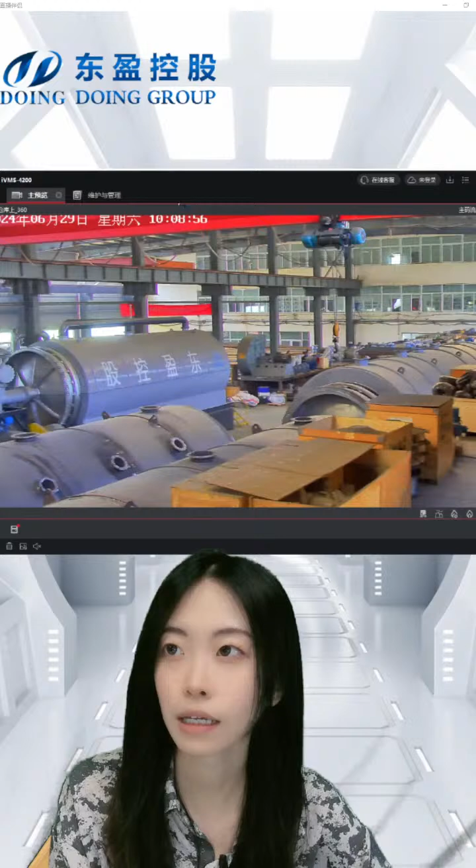I can show you some monitors about our factory. Wait a minute, these are some monitors. I'm not sure whether you can see. This is the monitor right now, showing our factory. And this is the name of our company, we call it Dongying Konggu in Chinese, and in English we call it Henan Doing Environmental Protection Company.

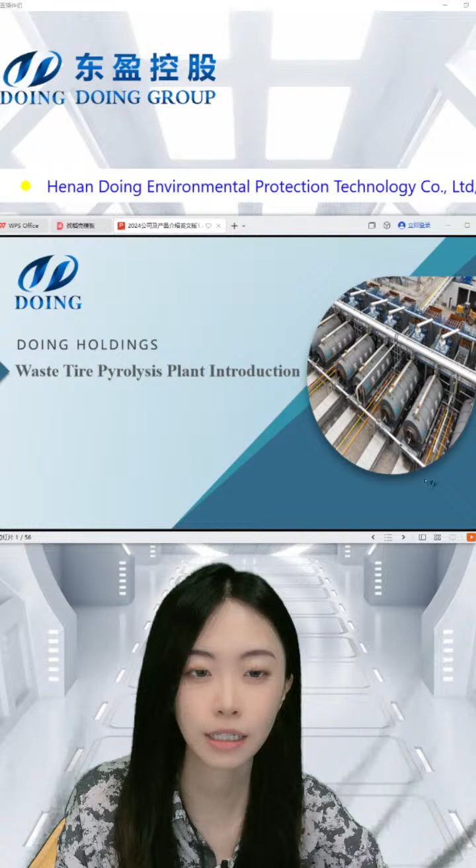Today I'm going to tell you about this PowerPoint, to show the material, show the industry, show the design, the technique of our equipment. And this is the contents. I will show you about our company and show what equipment our company has. We have three kinds of equipment: the batch type pyrolysis plant, the fully continuous pyrolysis plant, and a semi-continuous pyrolysis plant.

They have different kinds of raw material to deal with, and they have their advantages. The features of each is different. So today I'm going to tell you. Any questions you want, just let me know, and thank you.

The third thing is I will show you how our products can be used, what it's used for. Okay, and next is the most important thing, the most common thing our bosses, our friends, our clients have asked, is the environmental protection system. I will show you later.

So you may ask, does our equipment have pollution, or is it environmentally friendly? Does the government allow us to do this project? Well, I will show you. And now I can first tell you that we are environmentally friendly, and for example, in China, our government encourages us to do this project. But first, you need to have some allowance, appliance to the government.

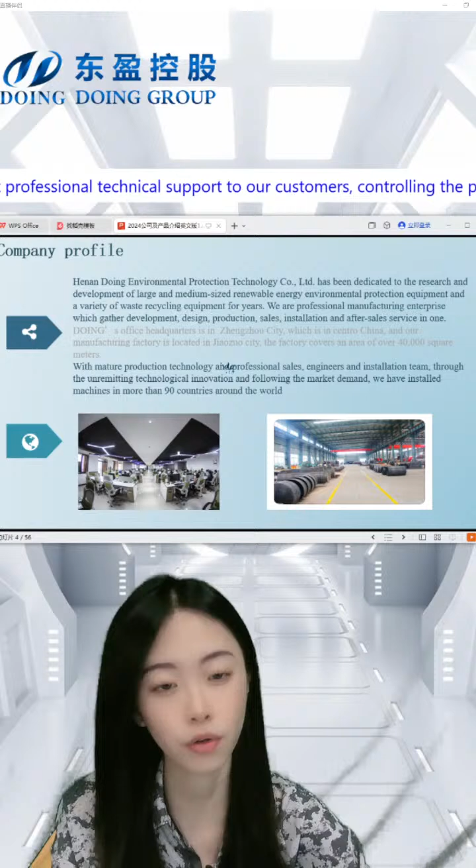We were set up in 2011, and we have a history of more than 10 years. We have more experience in the history, the market, the industry, and the design of the equipment. We have professional manufacturing enterprise, which gathers development, design, production, sales, installation, and after-sales service in one.

We are located in Zhengzhou City, which is in central China, and our manufacturing factory is located in Jiaozuo City, nearby Zhengzhou. It's the nearest factory to Zhengzhou City, and the factory covers an area of 40,000 square meters, very large. You can see just now many kinds of equipment fully occupy the factory.

With mature production technology and professional sales engineers and installation team, through technology innovation and following market demand, we have installed machines in more than 90 countries around the world. So we have our clients all over the world, not only in China but in other continents, in other countries. Let's have a look at the distribution of our clients.

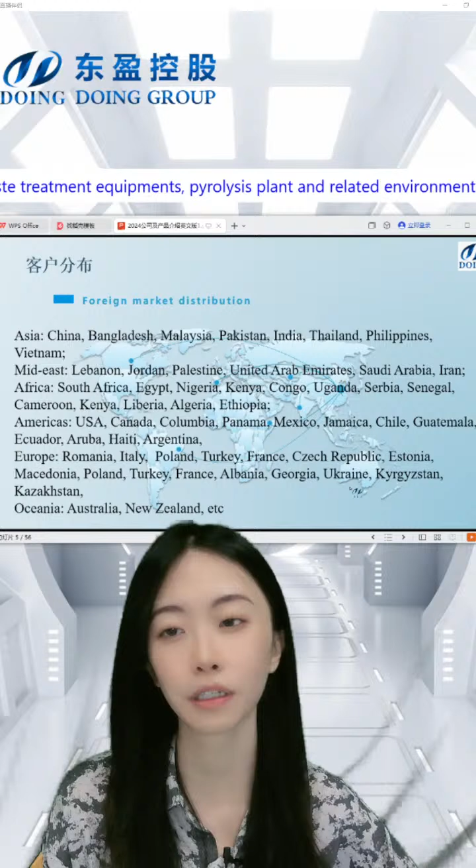So clients are welcome to visit our client's factory to see how our equipment works, or what profit they can get. Is it worth having this project? You can have a look. Visitors are also welcome at our company, our factory, or our client's factory. Both are okay.

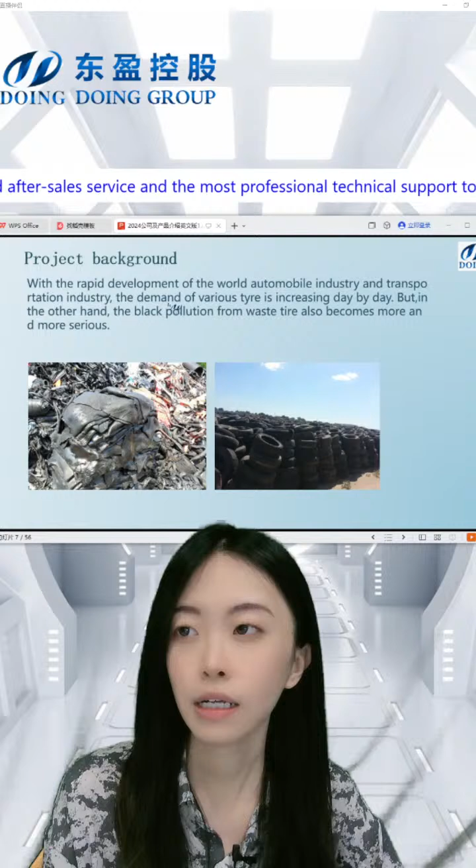Let's see the background of our equipment, or of this kind of product. With the rapid development of the world automobile industry and transportation industry, the demand for various tires is increasing day by day. But on the other hand, the black pollution from waste tires has also become more and more serious.

These are some ways to deal with waste tires, but we can see that they cause more pollution. Waste tire is a kind of non-fusible or refractory polymer material. It takes hundreds of years for the large molecules to break down, and it affects the normal growth of plants in the earth.

More and more waste tires not only take up large quantities of farmland, but also breed insect-borne diseases, causing serious environmental pollution. It will have some influence on people's life and property security. So it's called black pollution.

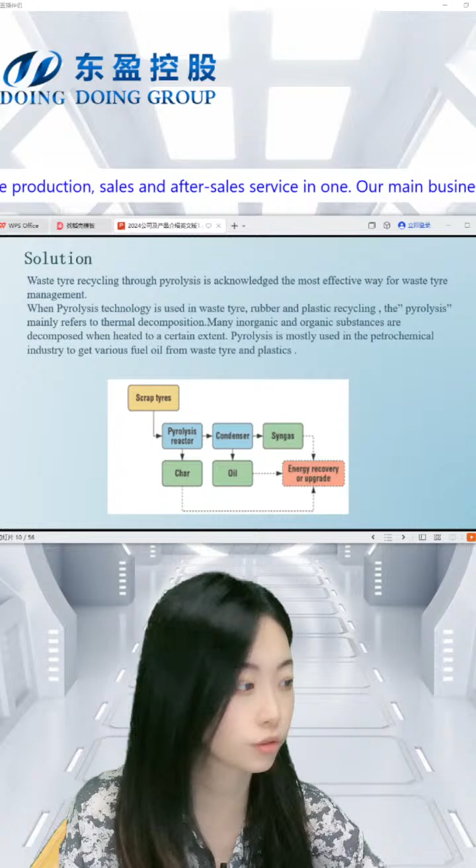As for our equipment, it can transform waste tires, waste plastic, oil sludge, medical waste, or daily waste into treasure, into oil, into fuel oil. This oil can be used by factories, brick factories, glass factories, and plenty of other places. This is one solution to deal with waste tires: to pyrolyze them.

While waste tire recycling through pyrolysis is acknowledged as the most effective way for waste tire management, I'll show you later how this work line works, how to transform the waste tire to the oil.

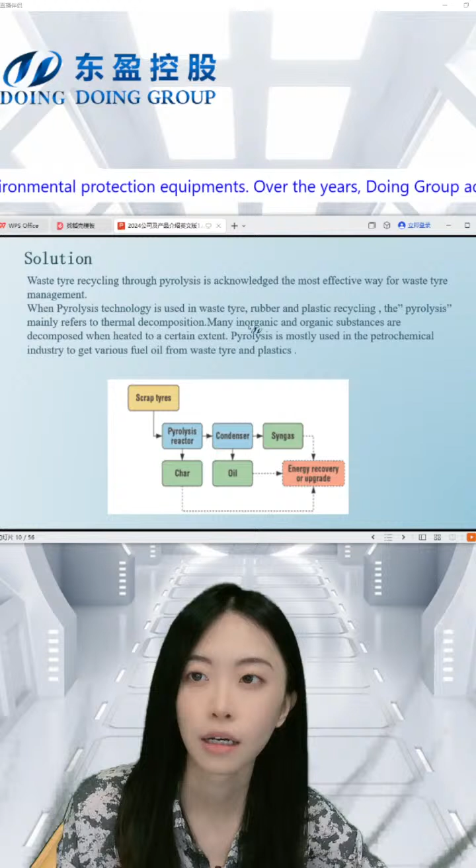The pyrolysis technique is used in waste tire, rubber, and plastic recycling. Pyrolysis mainly refers to thermal decomposition. Many organic or inorganic substances are decomposed when heated to a certain extent.

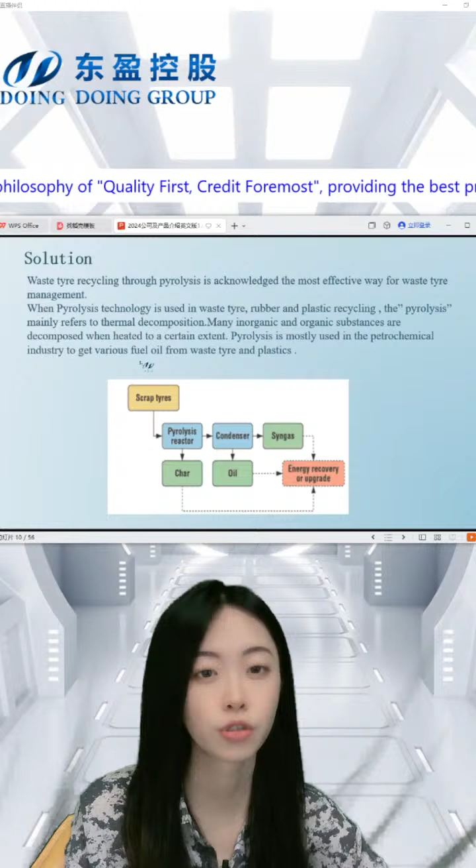Pyrolysis is more used in the petrochemical industry to get various fuel oil from waste tire and waste plastic. This is an easy picture showing how it works. We first get the waste plastic or waste tire, then put it in the reactor. After heating to a certain extent, we get the oil gas from the pyrolysis. Then through the condenser system, we get the oil.

About DOING pyrolysis plant, our equipment, and the raw material about it - this page gives you an introduction, you can have a look, this word is much more clear.

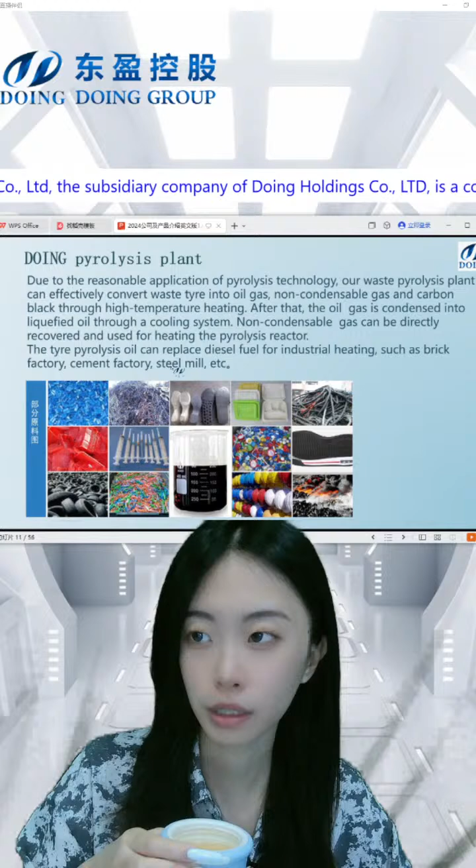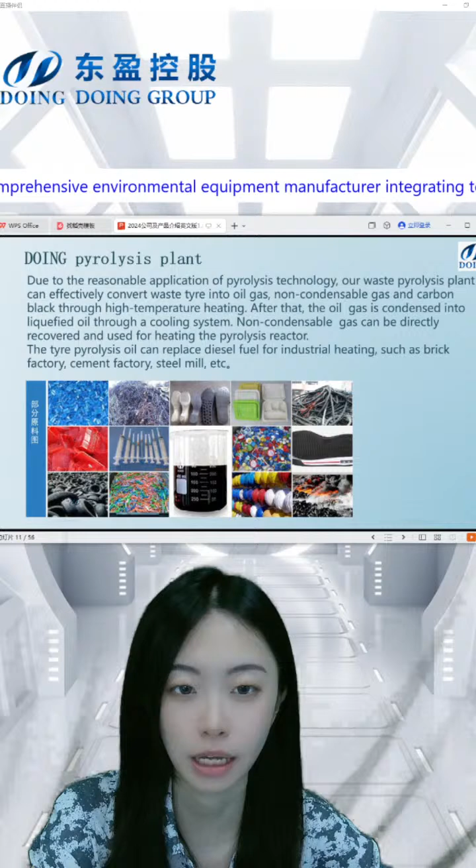And this is some pictures of our raw material. The most common raw material is the waste tire, and some plastic. This is also a rubber material.

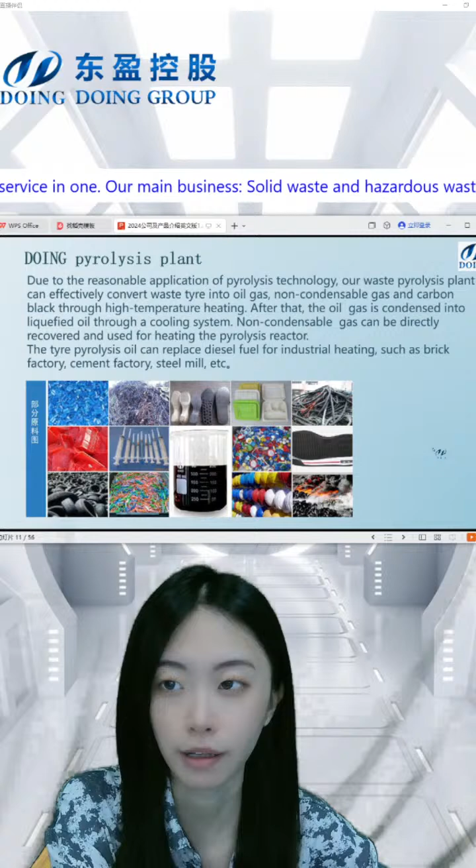Same as the waste tire, it shows like this, and some tube have some rubber, or some plastic, the medical waste, the helmet, the plastic bottle, or some paper mail waste, daily waste, the boxes. Plastic box can also be the raw material to be pyrolyzed, and this is how our equipment works.

This is a 3D photo, and maybe it's not clear - the word is so small, so I can show you some 3D video. Wait a minute.

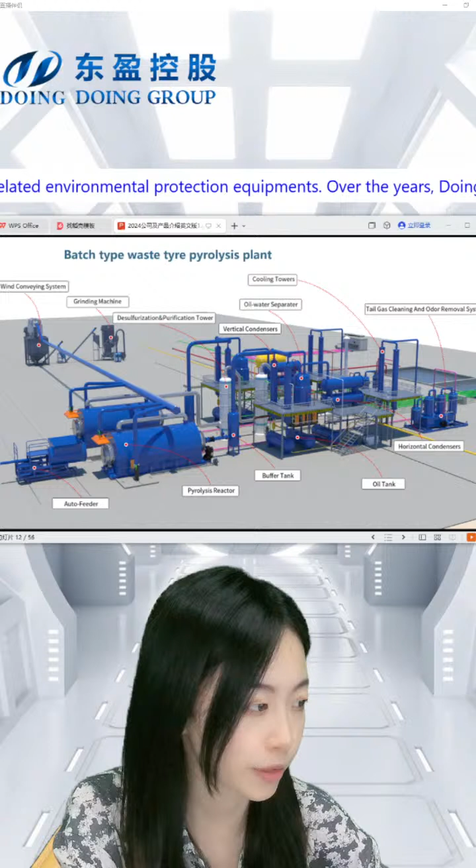Welcome. We are the waste tire with plastic pyrolysis equipment manufacturer, and later I will show you how our equipment do that. I open it. Okay, this.

What does it do? This is a pyrolysis equipment to deal with waste things like waste tire, waste plastic, to fuel oil, and the oil you can use at cement factories, brick factories, glass factories to have the heating energy. This is what the equipment can do, and later I will show you how it works.

This is a 3D video about the batch type pyrolysis plant. You can wait and listen to this introduction. The batch type can deal with many kinds of raw materials - maybe all kinds of material that can be pyrolyzed can use this kind of batch type, because the reactor is empty inside, and you can just directly put the raw material in it.

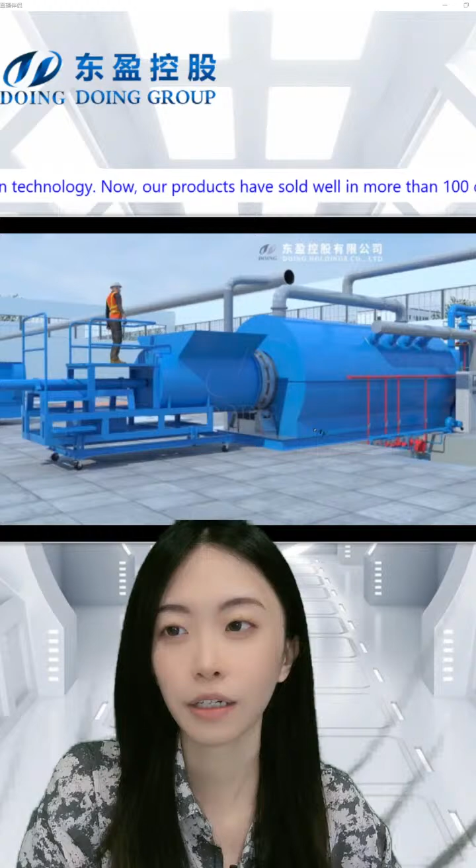And this is the carbon black. If your raw material is the waste tire, you can get the fuel oil, the carbon black, and the steel wire after the pyrolysis, and it also can have the profit.

The capacity of one batch type is from 10 tons to 15 tons. It can do with 15 tons of rubber waste tire, and this is a feeding process. And now is the reactor, the pyrolysis project.

After the heating, we will have the oil, the fuel oil, after pyrolysis, and the oil will get out from the outlet. The temperature of it is from like 200 to 400.

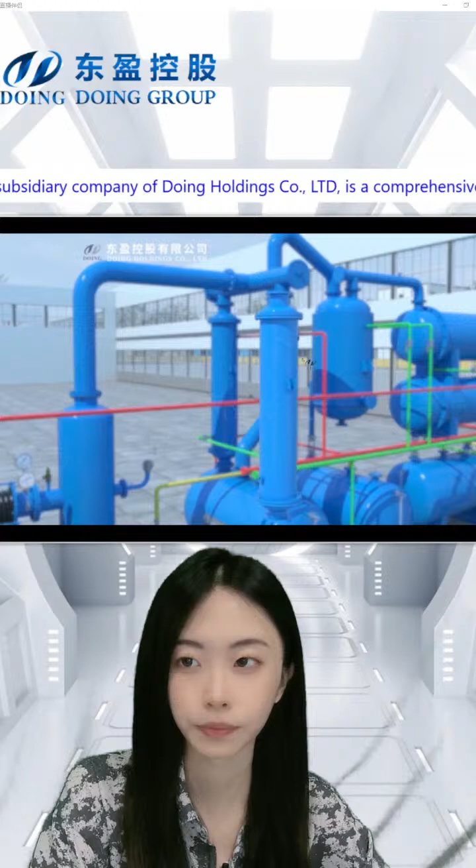And this is a buffer tank. The fuel oil runs out to the outlet, and then they will get to the condensing system to cool down the oil, and we will get the fuel oil. This is a condensing system - we have 7 condensers and 4 steps. This is the first step. Yes, it converts into fuel oil.

The fuel oil can replace the diesel or some coal, some natural gas to use.

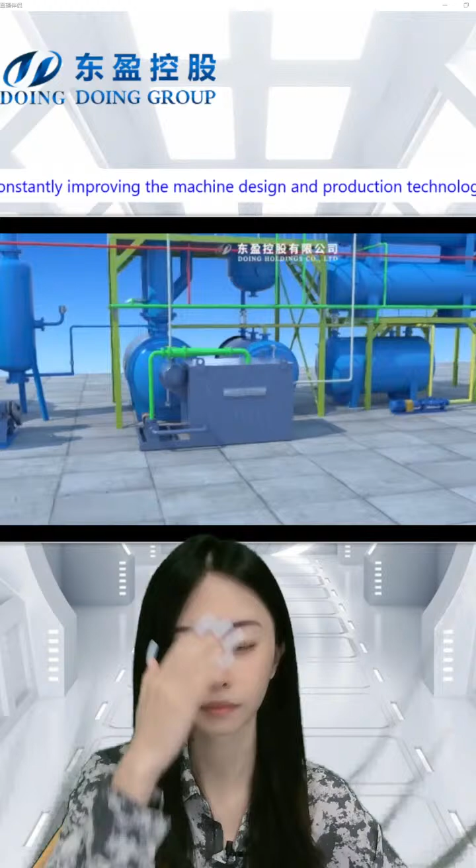Well, about the heating energy we need: for example, if you get the fully continuous pyrolysis plant, it can work for 45 to 60 days, and we only need about 8 hours to use your own energy, like the fuel oil, diesel, coal, or wood, to heat the reactor. You just need 8 hours.

In the beginning of the reactor's pyrolysis, and for the next 45 to 60 days, you only need the tail gas from our pyrolysis to be the heating energy to heat the reactor.

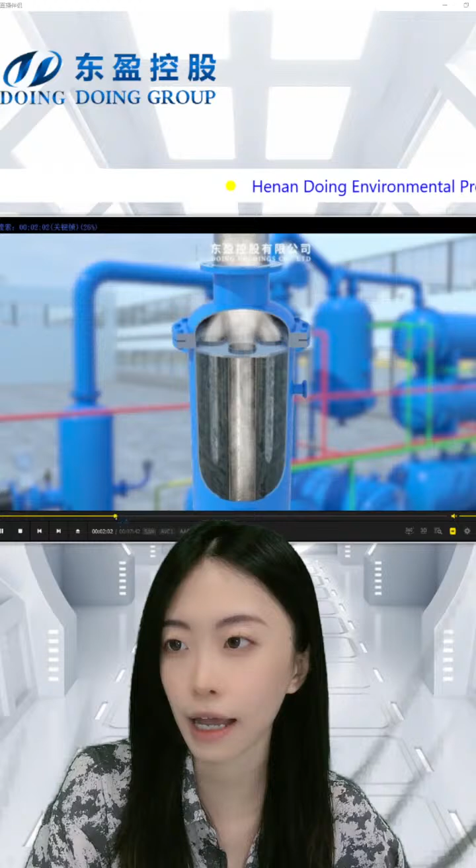In the 3D video I will show you that gas. This is the gas we get. There's not only the oil gas, the condensed gas, but also the uncondensable gas, which we call the tail gas. It can return to the reactor for burning, so it's much more efficient for heating. It saves our energy.

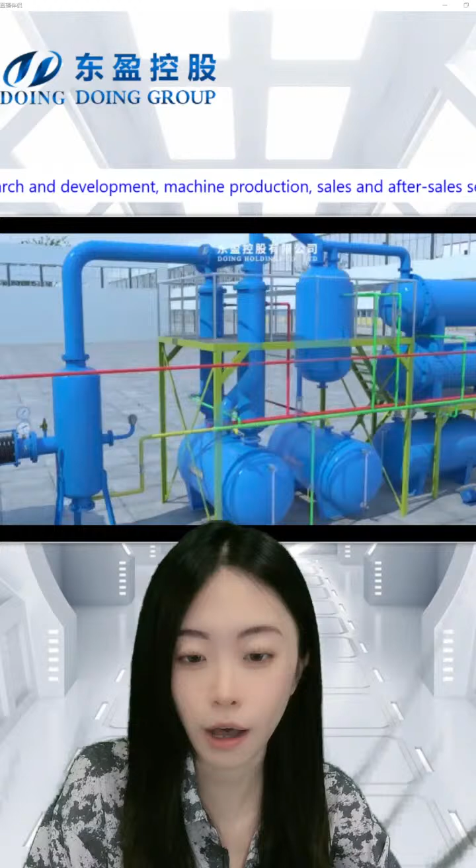Discharge. Well, if your raw material is the waste tire, your product is the oil, the fuel oil, and the carbon black, and the steel wire. We can get the fuel oil after the condensing system, and we can get the carbon black after discharging.

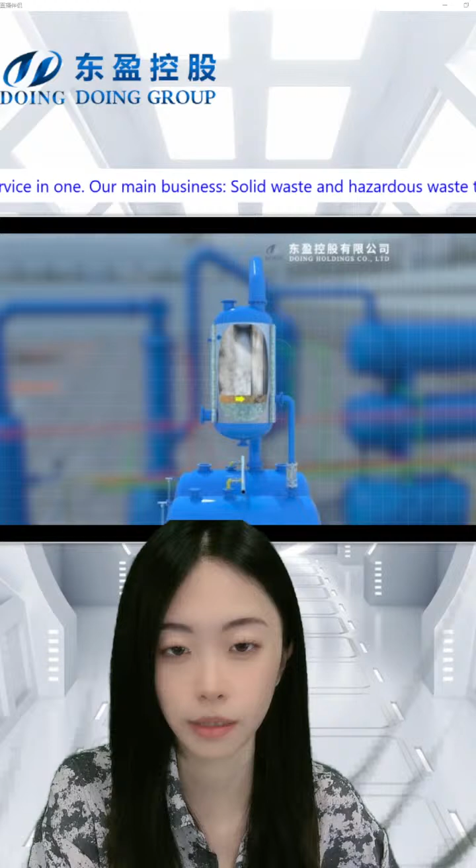We can discharge by machine or just use workers. So if you have the batch type pyrolysis plant, you can discharge the carbon black after pyrolysis. But if you get the fully continuous plant, you can feed the waste tire or waste plastic and discharge the carbon black at the same time at a very high temperature. It's very time saving.

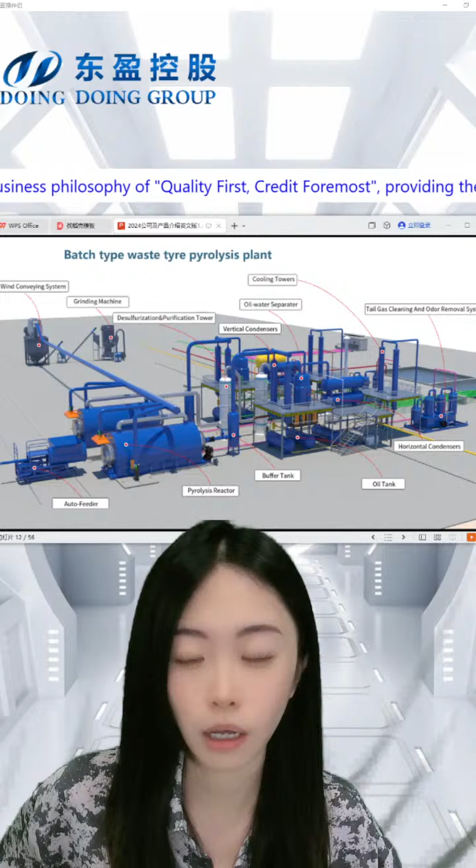Later I will show you the emission. So you want to know the emissions? Well, about the data, you need to contact our manager. I will show you whether this PowerPoint has the emission information. Wait a minute.

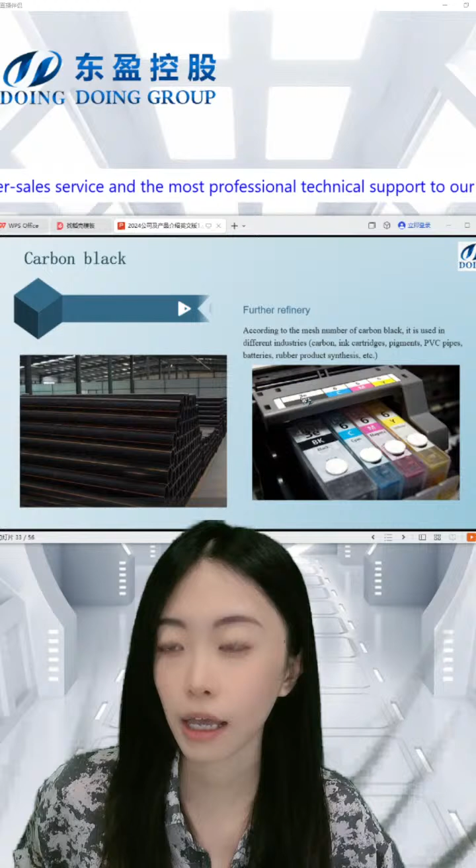Well, we have the gas purification system, and we need to deal with the emission because we are not allowed to just release it like this.

So this is the pollution of the air. We have no air pollution. We are not allowed to release the gas to the air directly. We have the purification system, and it can reach the standard of different nations.

Look at this, this is the purification system to purify the gas, the SO2. Sorry.

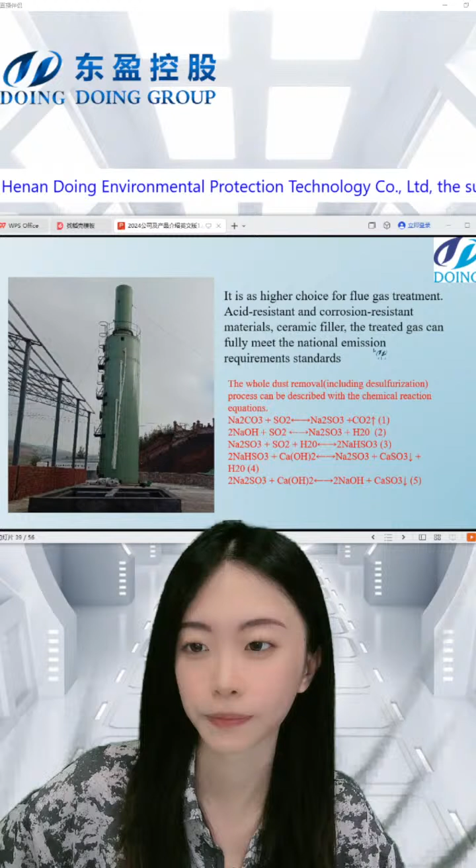This is the kind of way to deal with the carbon dioxide and sulfur dioxide. Well, some details about it, because different regions have different kinds of policies about the release of the smoke, the gas.

We don't have a single 100 tons per day plant. The biggest capacity of our plant is 50 tons, but you can buy 2 lines to reach 100 tons per day. There are very few companies in China that have a 100 tons per day plant.

About the dust, we just purify it and clean it. For example, we have a water pool and recycling water to clean the dust and other waste. We have 2 pools for water - one is the cooling water, another is just the purification water.

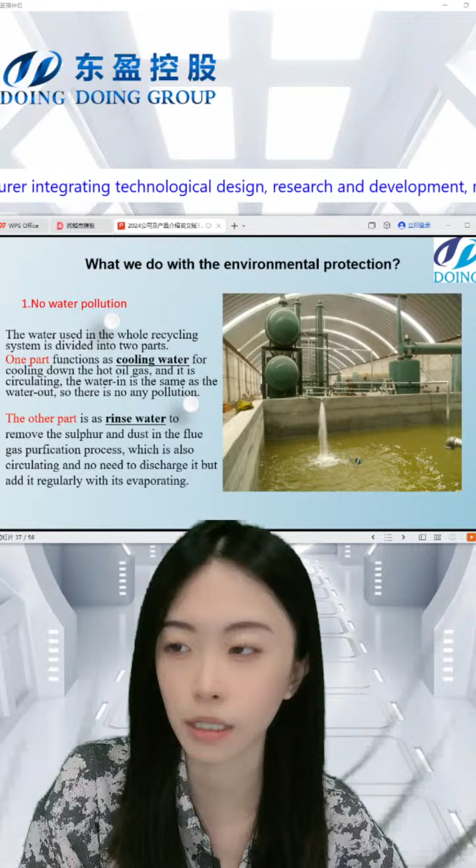This kind of pollution includes water waste, smoke and tail gas, carbon black powder and ash, or some sound waste. We don't have water pollution because the water is recycled and doesn't need to be discharged elsewhere.

About the air pollution, it can reach the standard of different regions' policies. About the carbon black waste, there's some ash and smoke, but for the carbon black we have a special seal design.

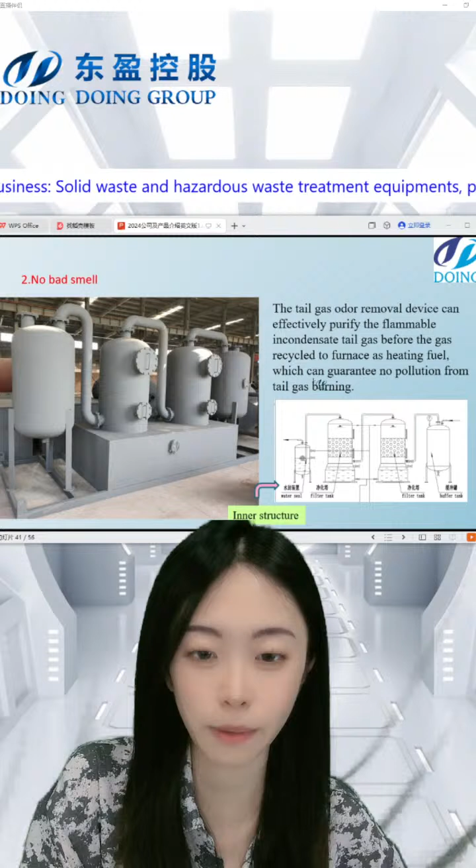For example, we have some bad smell. If we use the tail gas and just burn it directly, there's a bad smell, so we have our own patent to clean and filter the tail gas. Then it's returned to the reactor, so you don't have pollution from this.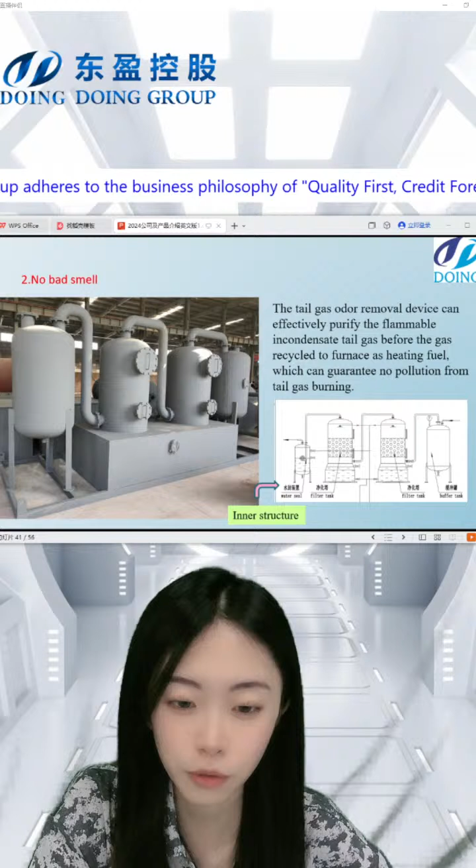About the flue, it's also linked with the purification system to achieve purification.

The burning system is in the reactor and it's also sealed, linked with pipes. You can see this is a burning system and it's sealed, and the gas will go through the pipe back to the reactor.

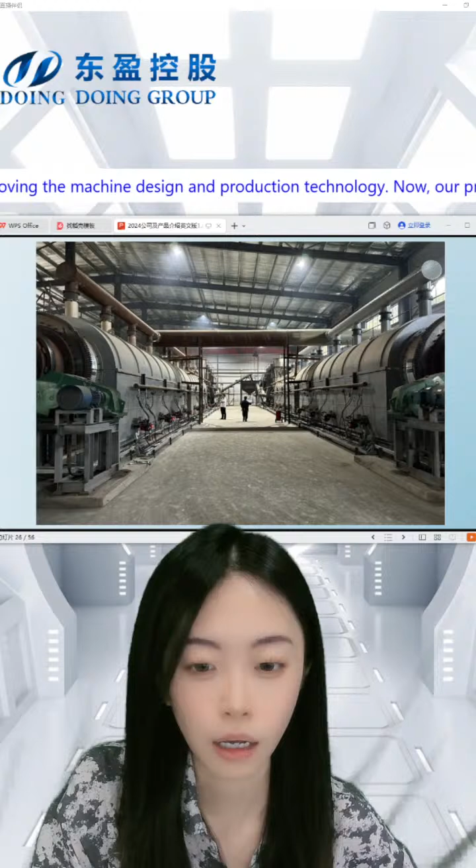Well, for some data about it, I need to ask the engineer or the sales manager to answer you. So you can leave your number with us, and I'll answer you after the live show, okay?

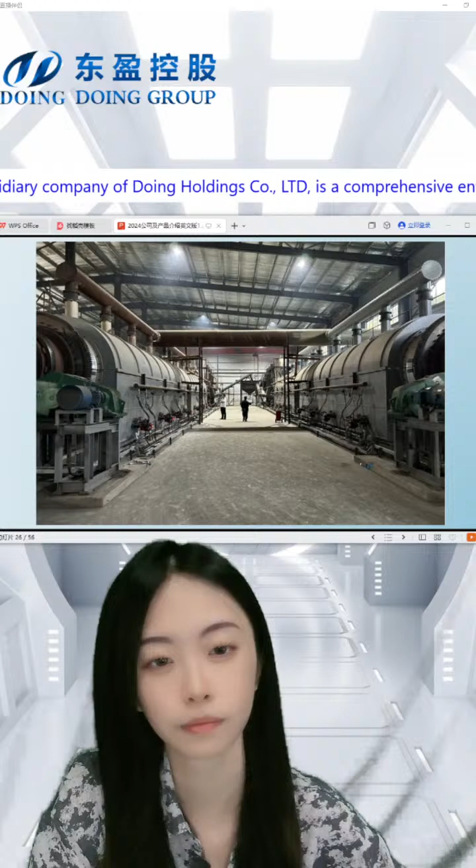Just as the assistant said, you can do the testing. If you have some raw material like waste things, waste tires, or medical waste, you can send your material to our company, and we have a free service to let you know your oil yield.

From the questions you just asked, sir, I know you have some experience or knowledge about this industry. To know more about the detailed data, you can talk with our engineer. We have an engineer team to show you the professional data.

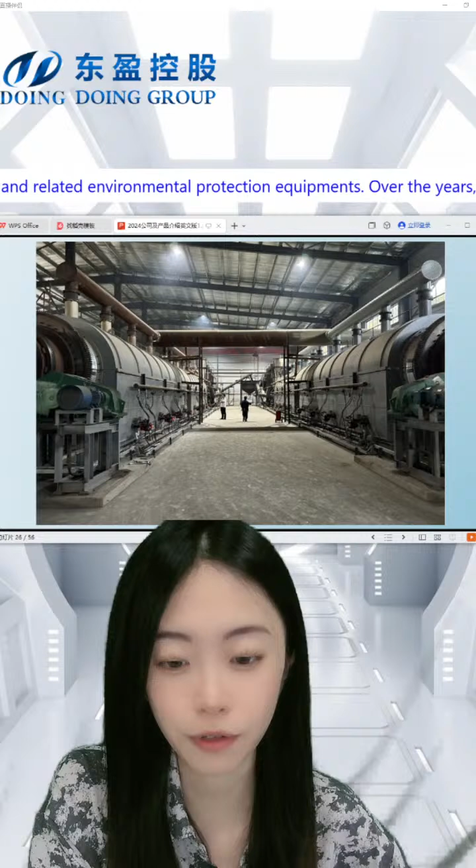No, it doesn't need any cost. It's free, our free service, different from some other companies. It's free to show you what your material's oil yield is, how much, and our engineer will give you some analysis about the profit based on your raw material.

You don't need to worry about it not being convenient because you're far from China. You can give us some pictures or videos of your raw material, and we have similar materials from other continents to give you an analysis based on that. That's also okay.

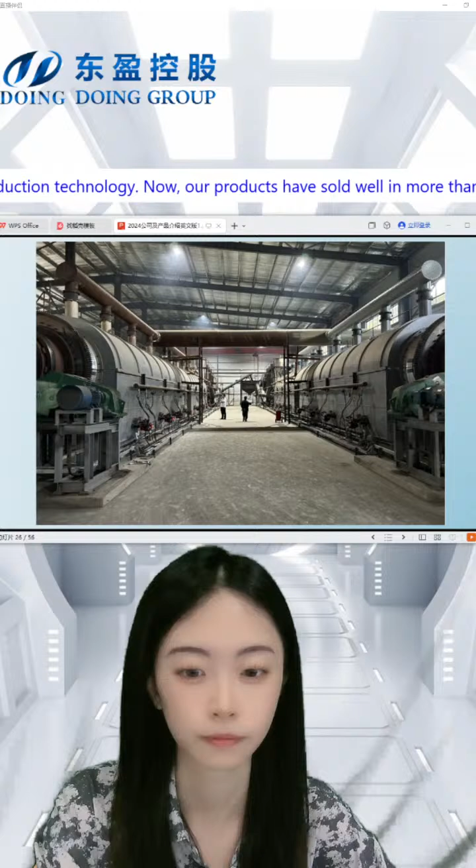Okay, let's go on with this PowerPoint.

We show the 3D video about the batch type. We also have the semi-continuous pyrolysis plant and the fully continuous. They are different capacities with different ways of pyrolysis for feeding and discharging.

For example, the fully continuous plant's biggest capacity is 50 tons per day, and we need to feed rubber powder, not the whole tire. We need to process it into rubber powder to feed it in a sealed environment, and we can ensure it can feed and discharge at the same time for 45 to 60 hours.

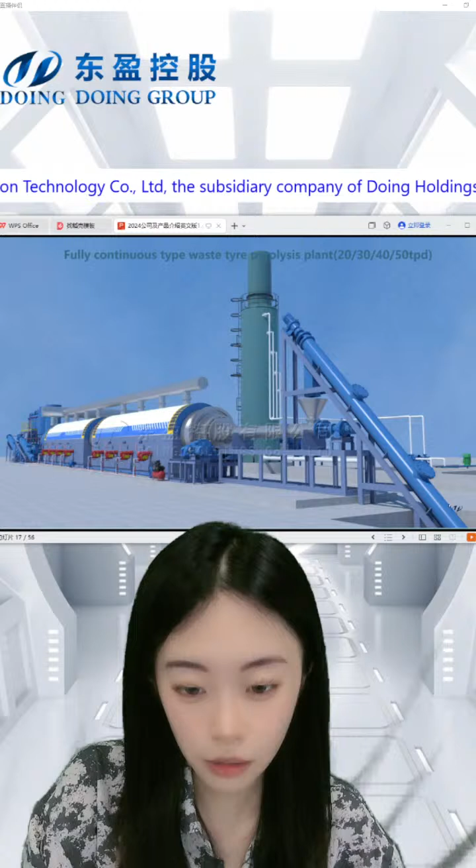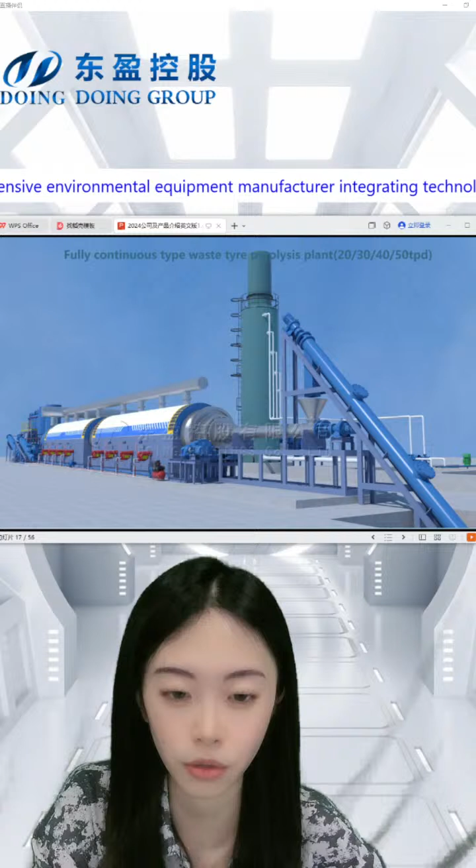Yes, you want to know about the data? Of course, you can just talk to the engineer or the sales manager. They can give you data about our customers or equipment, the experiments our engineer has already done.

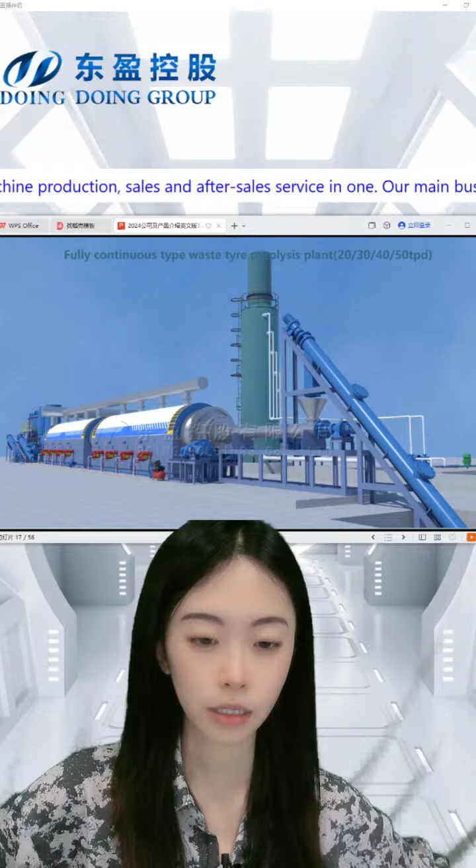Like our fuel oil from waste tires has very high heating energy, it can reach 10,300 kcal. And if your raw material is plastic, the quality of the oil is even higher than the waste tire oil. It's due to the different kinds of raw material you have.

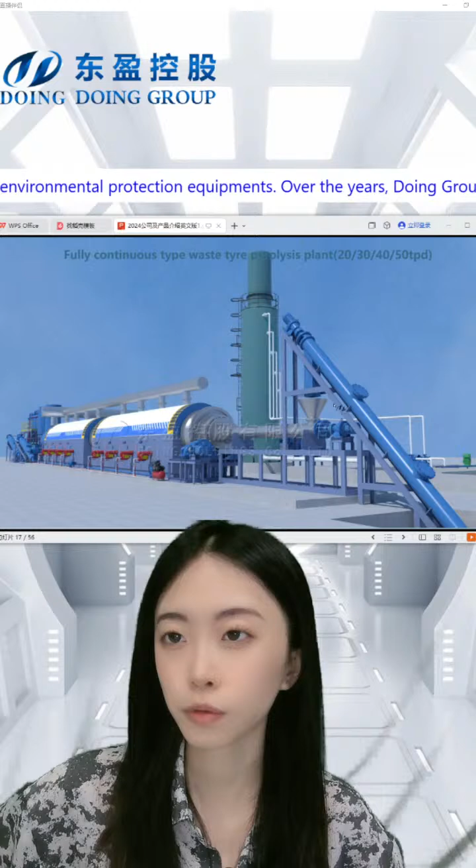This is fully continuous, and it can run for 45 days. For the semi-continuous, it can also discharge the carbon black at a very high temperature, and it can run 2 days for each of the three steps of the reactor.

You guys manufacture the machines yourselves? Yes, we have our own factories, and all the equipment is our own product.

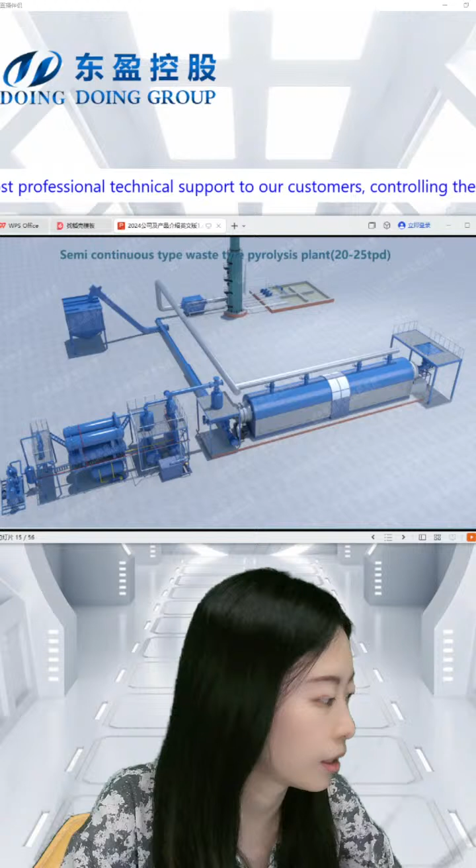Wait a minute, I can show you the monitor of our own factory. It's more than 40,000 square meters. Sorry, wait a minute, something's wrong with the computer.

And well, we have installation service and after-sale service for 1 year to make sure the quality.

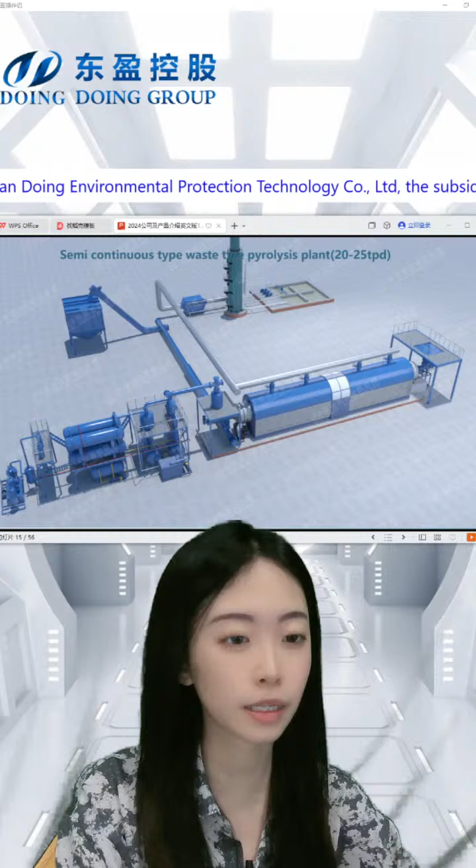If you have something wrong with your equipment or other problems, you just need to talk with the engineer. We have whole life service. Our engineer and worker will come to your country for installation, and for any problem afterward, you just need to contact an engineer - it's whole life service.

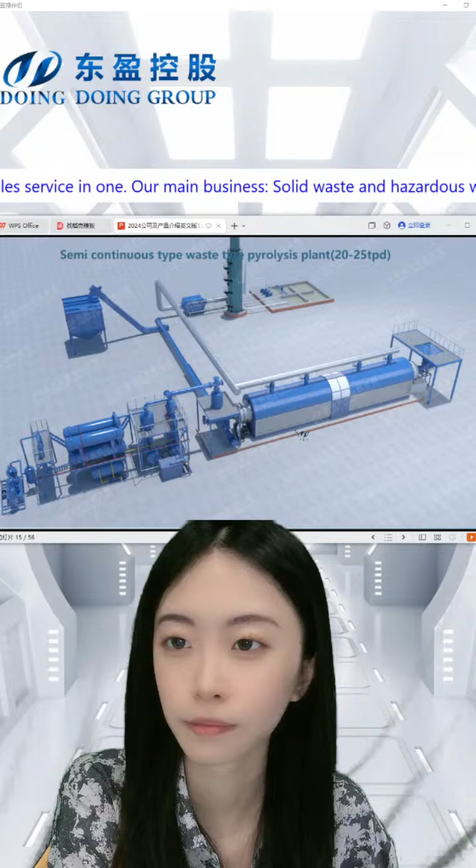Because we have different kinds of equipment, you can reach your requirement, like what kind of reactor we have, or the feeding system, the discharging system, the cooling system. They're different.

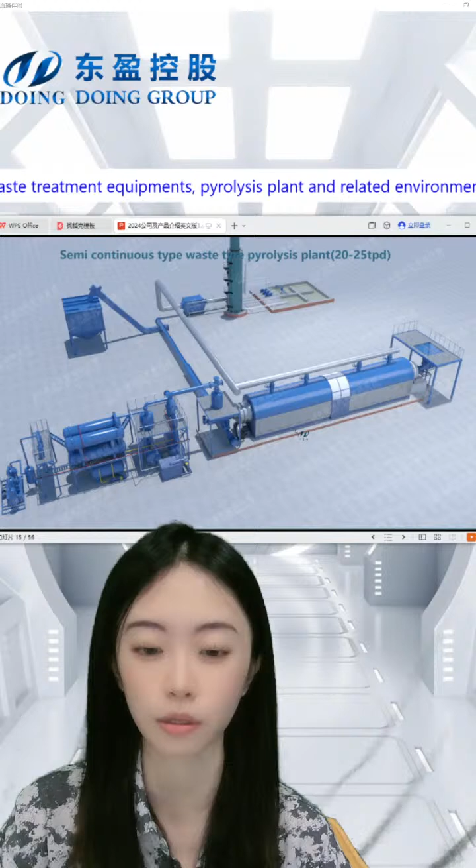You worry about the service? Well, we have many years of history, with clients in over 100... countries. So we have a service where you can come to the client's factory to have a visit and have a communication with them to know more about the service.

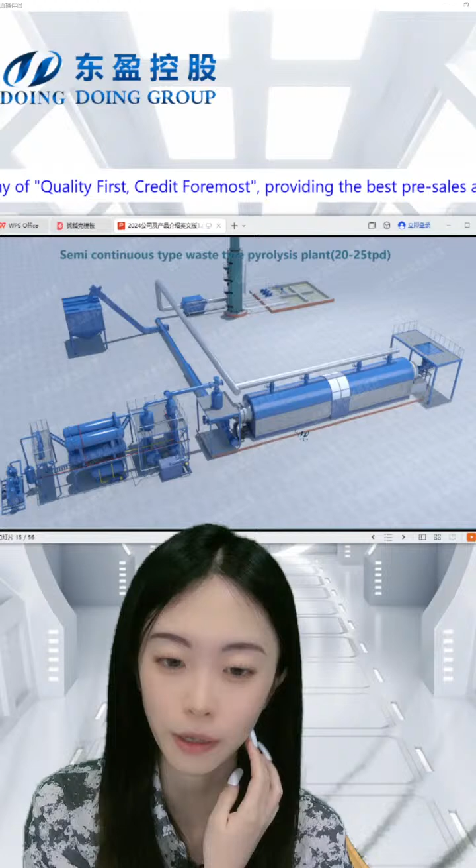Where do you want to have this project, which regions? I can check whether we have some equipment or some client in your country.

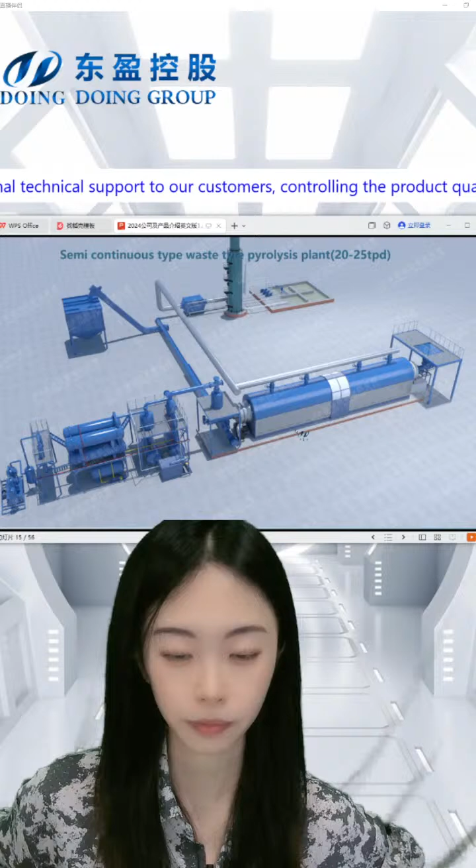You can visit their factory to know more information, or you can come to our own factory about the qualities. You can know more about the qualities, because we have many bosses from all over the world coming to our factory and our company every day to have a visit. You can know more information. Then we just call or chat on WhatsApp or just in the live show.

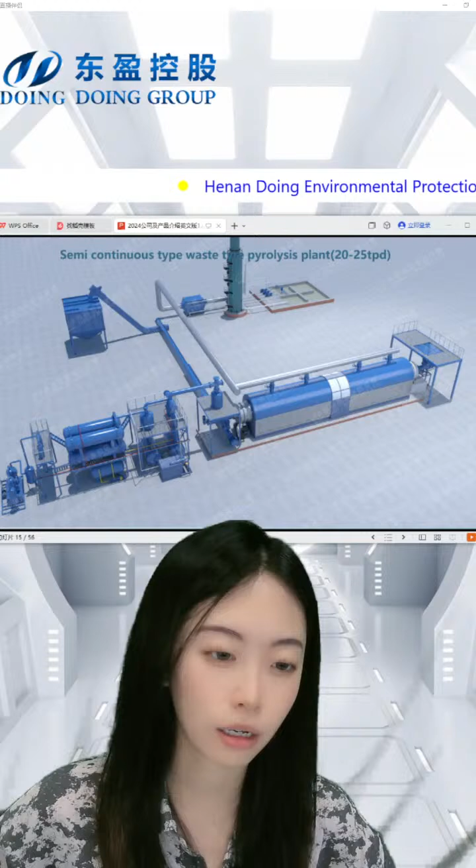Well, we have some training for your workers. Our engineer will give you some training, and of course you need to run your project, run your factory, run your equipment in a very standard way.

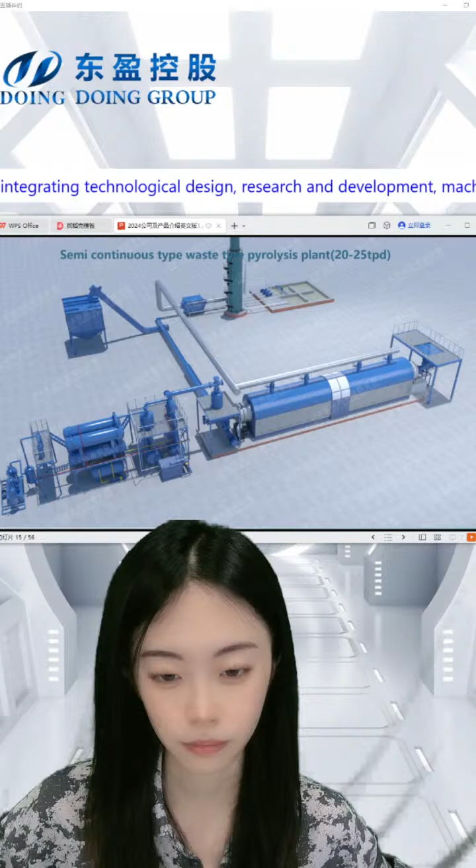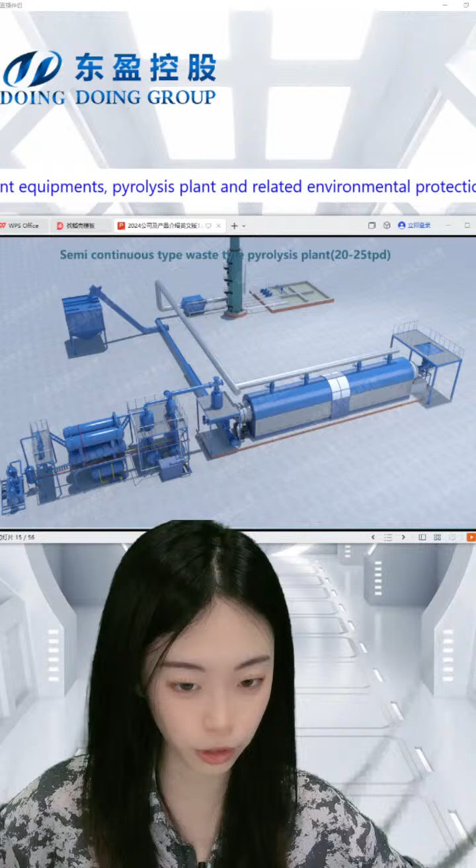Our engineer will give you some suggestions about how to work this equipment for a longer life, to maintain it in a long life. For example, if the raw material is plastic, it will have some problems, it will block the tube or have some influence on the reactor. Or if your raw material is oil sludge, it will have a big influence on the reactor. We also have ways to deal with this kind of thing. You just need to talk with our engineer.

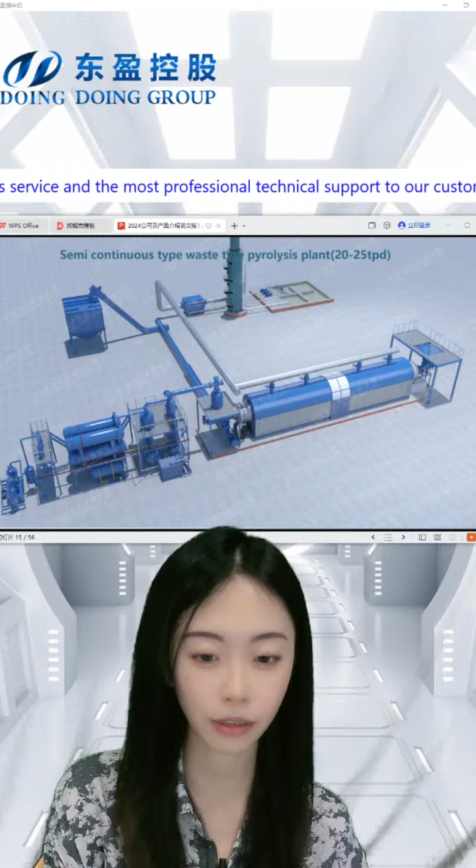Is it allowed? Well, I haven't heard of any other countries forbidding this kind of fuel from being used. It's just about how you use it, because you can't use this fuel oil in a car, but you can use it in brick factories, glass factories, or with refining equipment, and the refining oil is a non-standard diesel that can be used like for large agricultural machines, or ferries, or generators, and so on. It's just about the ways you use it, not the places you use it, so it's about use, not countries.

Well, if you want to know more about policies in different regions, our manager — we have two parts of managers, for Chinese customers and for customers abroad — and the abroad manager can give you an introduction about the policies in different regions and the market in different regions. They can give you an introduction.

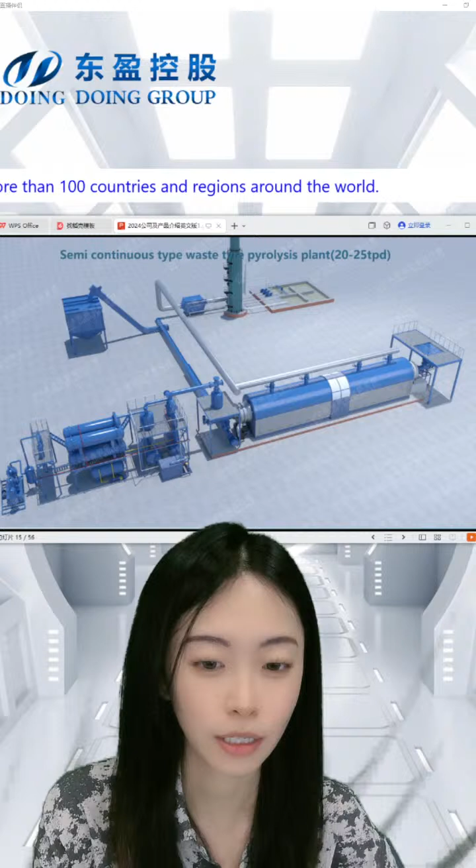Because we have more than 10 years experience and plenty of customers, our managers care for what the customers care about, and they have answered this kind of problem many times, these things your bosses are concerned about. You don't need to worry, just about the service.

Before you buy the equipment, our engineer will give you some analysis. For example, in China it's forbidden to directly do this project — you need to have some, not analysis, just application — and after that the government will allow you to do this. It's kind of hard work. Our manager will give you some help about the data or some details of our equipment.

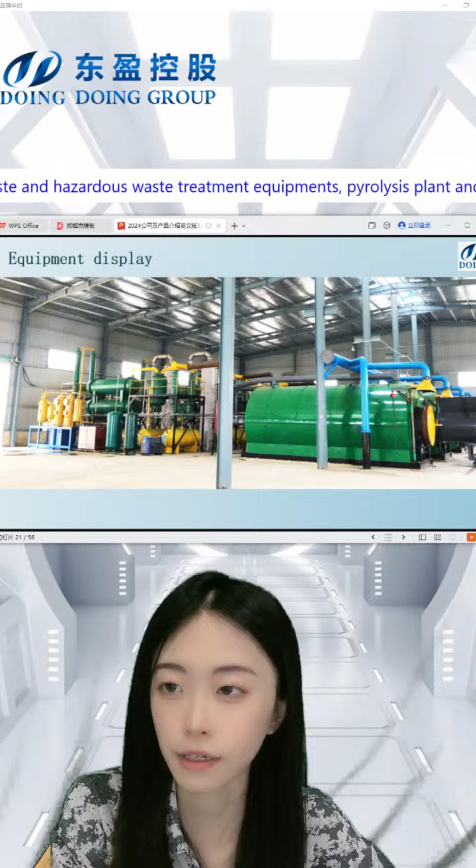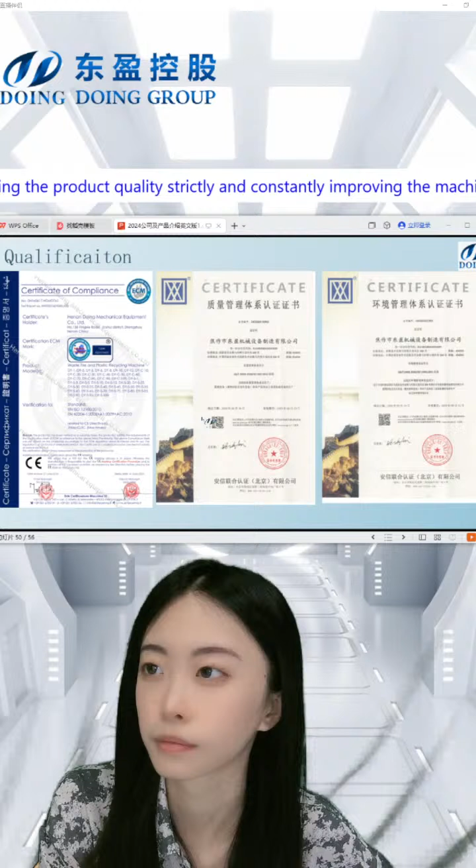There's just show you a little bit pictures. Can you see it clearly? This is the compliance certificate in Europe and in China, in different places.

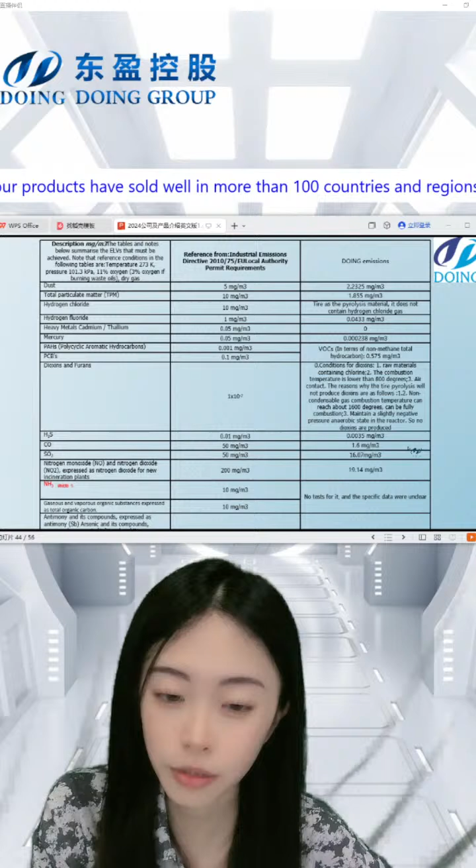We'll have some translation you can translate, or we have some certificates in your countries, in your regions.

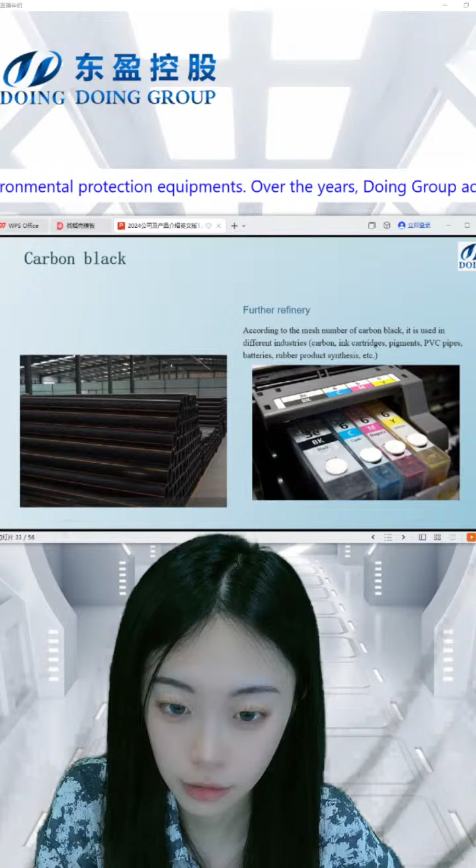How it works, gonna browse. Well, in this PowerPoint, I will give you a detailed introduction about how it works and what it can get. You want this PowerPoint, right?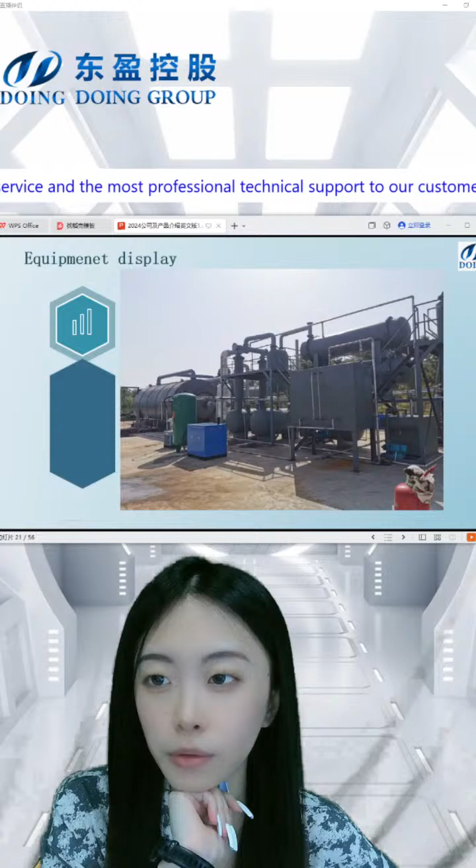Okay, and I can show you a brief introduction about how it works. For example, in this picture, if your material is a waste tire, you can put it in the reactor at a very high temperature, then we will get the oil gas after the pyrolysis, and through this condensing system.

To cool down the oil gas to the oil, and this is one of the most important products we get. And some other product like the carbon black you can use as a very high heating energy, and the steel wire from the waste tire is also one of the most important main products.

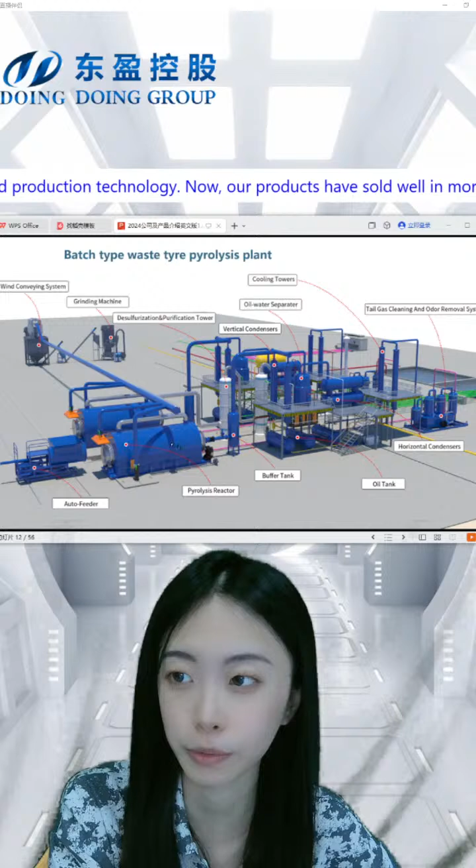This is how it works, and this is some purification system, the gas purification system, and the carbon black discharging system.

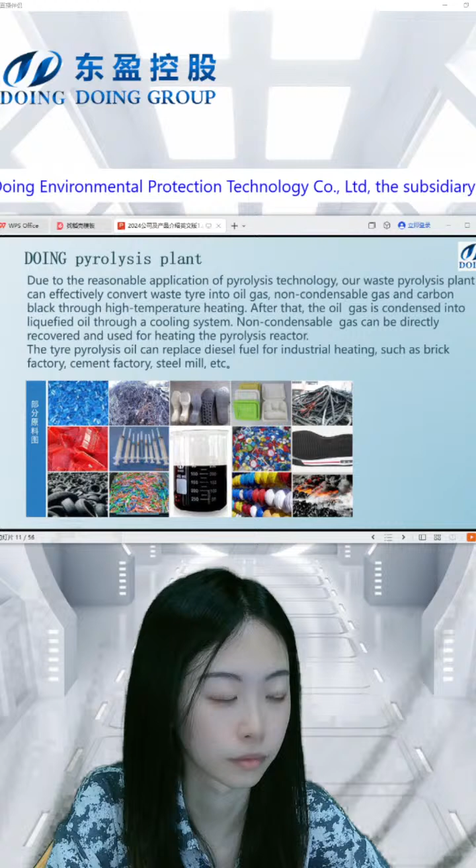Well, about the condensing system, we use the cooling water. The cooling water is recycled, we don't have the waste of the water. So there's no waste, we just have the pollution about the smoke or the gas, but we have the flue gas purification system to ensure our equipment is environmental friendly.

We have our channels or our own website, just shown in this common place, or we have a channel on YouTube, on Facebook, or TikTok.